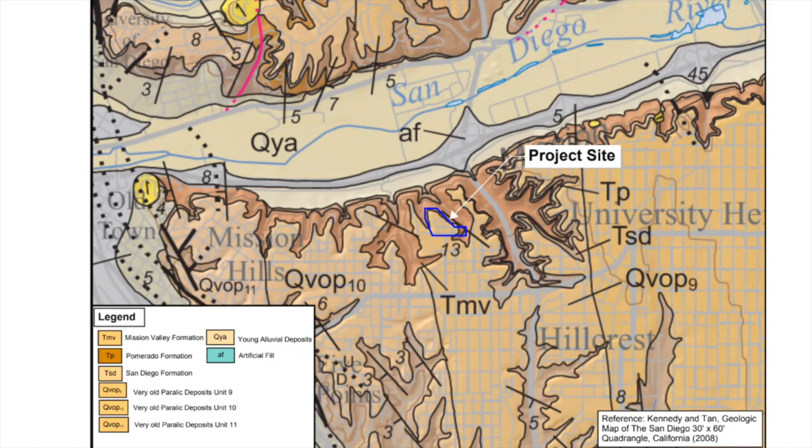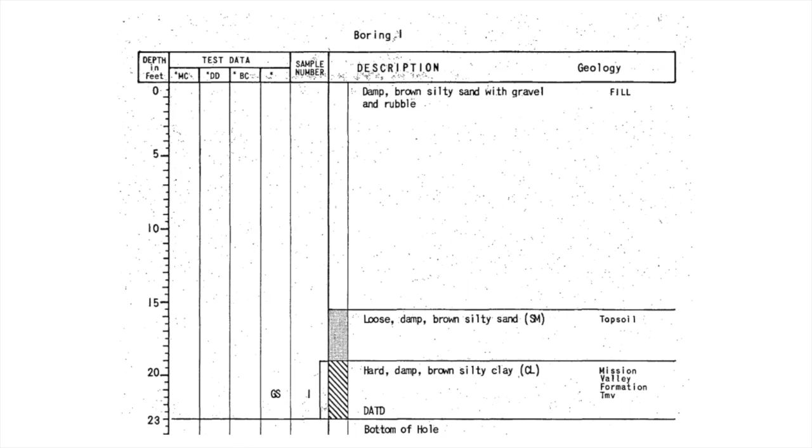Through our geotechnical investigations, we found that our site is underlain by 3 soil types: fill, Mission Valley Formation, and Pomerado Formation. In this historical boring, you can see up to 15 feet of fill, but this is only one point on the site, which means we are assuming that the depth is varying over the entirety of the site.

What are the potential issues that we can face on this site? We have 3 potential issues we can face. First, we have liquefaction. Second, we have expansive soils. And third, we have compressible soils.

Liquefaction typically occurs in cohesionless, loose sands that are saturated. In this case, liquefaction is not an issue, as our site has soil that has cohesion, is dense, and the groundwater is very low. Expansive soils have the potential to cause heaving on the structure, but in this case, expansive soils are not a threat, as the boring logs show no evidence of potential expansive material.

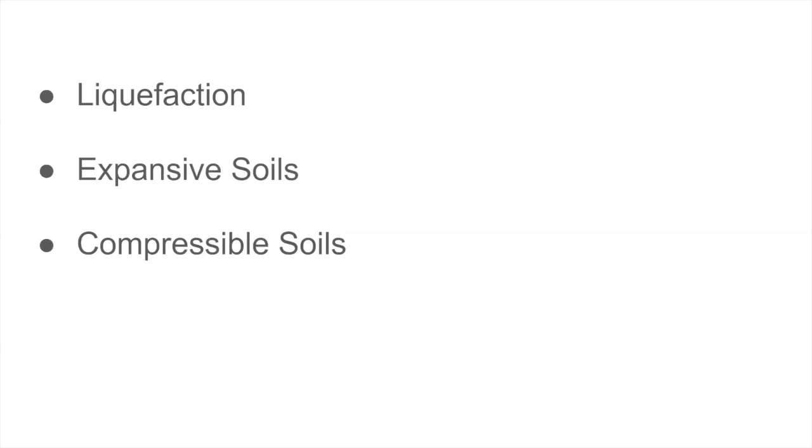Our third potential issue and most prevalent is compressible soils. Compressible soils are typically found in fill and generally experience a large amount of settlement. In this case, compressible soils are what we will aim to mitigate. Differential settlement is a direct result of varying depths of compressible soils throughout the site.

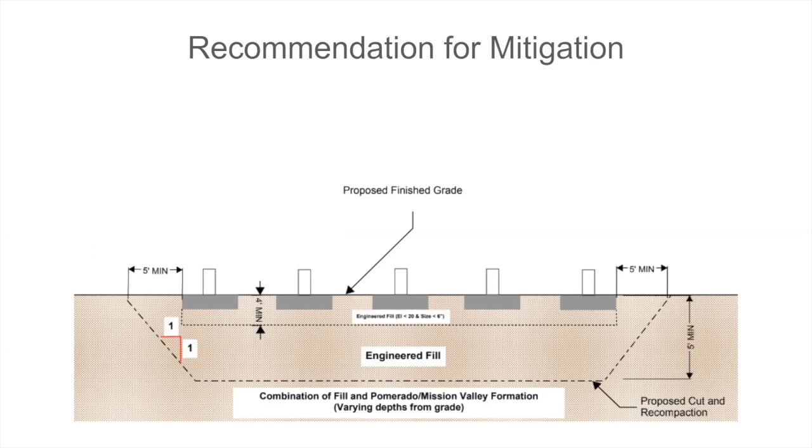Our recommendation for mitigation against differential settlement is as follows. The subgrade below the hospital should be over-excavated 5 feet in depth and backfilled with engineered fill. This engineered material will reduce the potential of differential settlement and should provide a uniform settlement for the hospital.

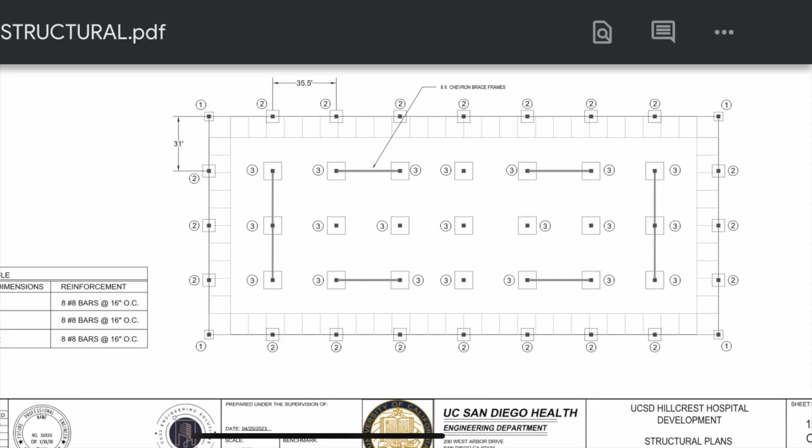Additionally, geotechnical investigation and grading conducted by geotechnical engineer Josh Jokes indicated that conventional shallow foundations are viable for the proposed subsurface conditions. In designing the hospital, we adhered to several codes including the ACI 318, the Steel Construction Manual, and the CBC. These codes provide essential guidance for ensuring the seismic safety as well as overall stability and durability.

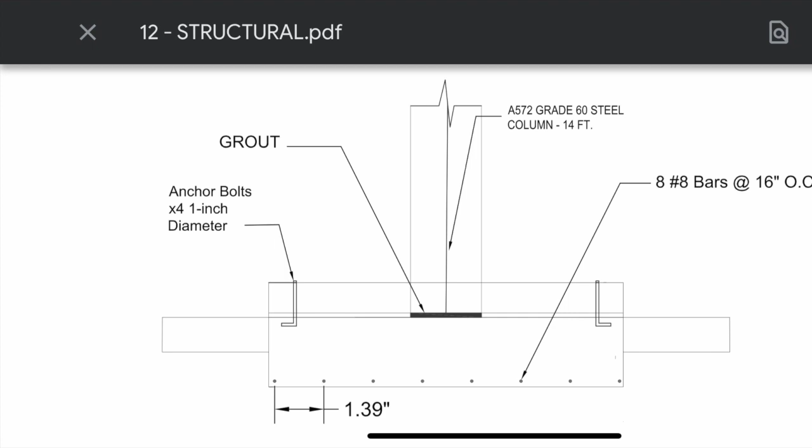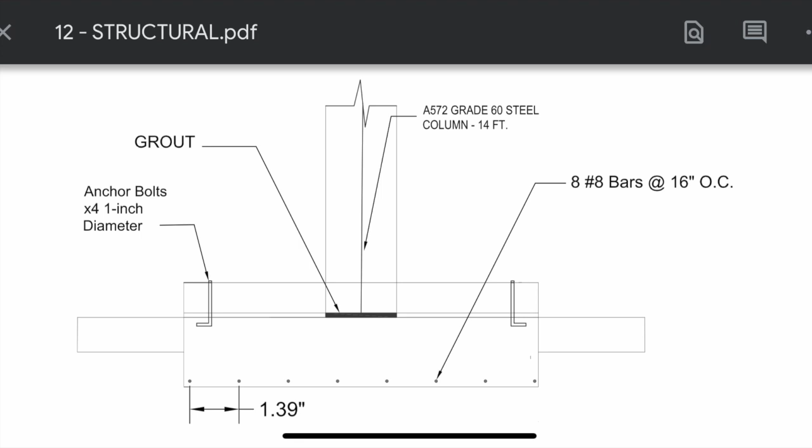CGJJ Engineering Solutions recommended constructing the hospital with a steel shell, providing optimal resistance against seismic activity while also accommodating additional loads due to unforeseen events like windy conditions. Based on their recommendations, the structural elements of the hospital were designed as follows.

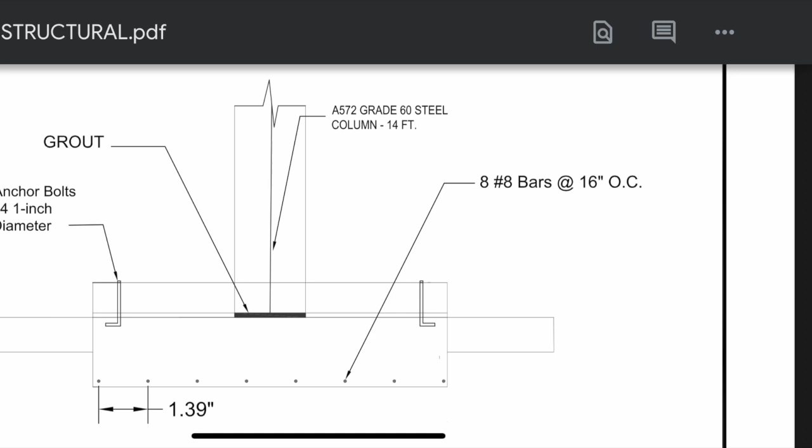4 5x5x2 footing slabs with 4 number 8 bars and 3.25 feet spacing, 20 7x7x2 footing slabs with 6 number 8 bars and 1.95 feet spacing, 21 10x10x2 footing slabs with 8 number 8 bars and 1.39 feet spacing, steel column height set at 14 feet. Also, finally, 4 chevron braces recommended for shear resistance.

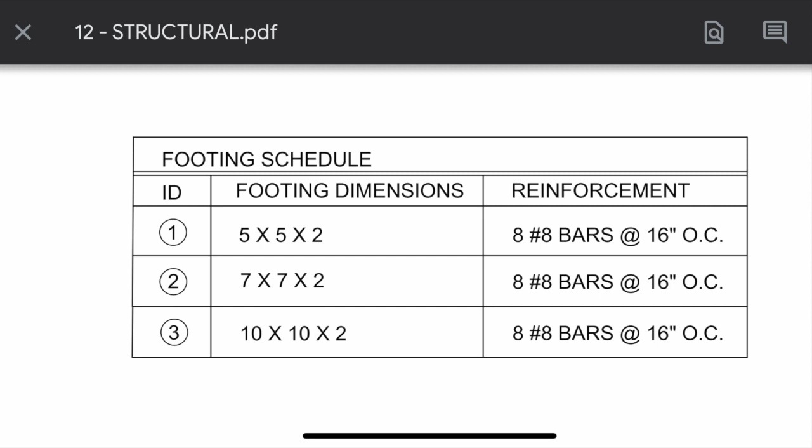The hospital design incorporates a steel shell, chevron bracing, and coupled shear walls to address the unique challenges at its location. These decisions were made with adherence to California standards and industry best practices such as ACI 318, the Steel Construction Manual, and the CBC, ensuring the hospital remains safe and functional during any potential seismic activities and other environmental conditions.

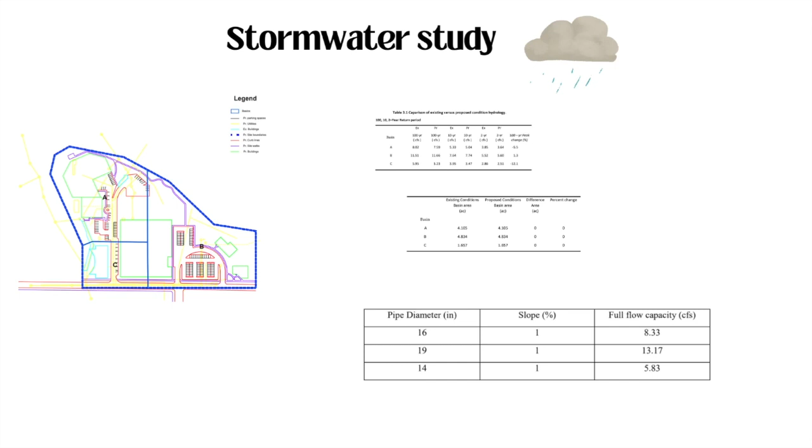For water and wastewater studies, CGJJ Engineering Solutions has determined water demand for the hospital. For our project, it was 91,872 gallons per day for indoor water use.

And our team have suggested 2 types of pipes to handle that requirement. For the potable water, our team suggested 2.5 inch PVC pipe, and for fire flow, our team suggested 4-inch PVC pipe. For wastewater, our team has estimated that the peak discharge flow rate for the worst case scenario would be

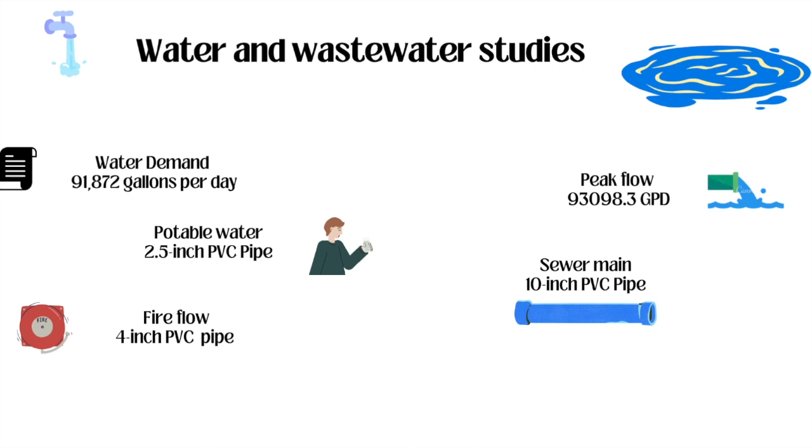93,098.3 GPD. And according to the information, our team suggested that the main should be 10-inch PVC pipe. On the site, there was already an existing 10-inch pipe, and our team gave a recommendation to use the existing one and check its conditions. Thank you for your time and for your attention.